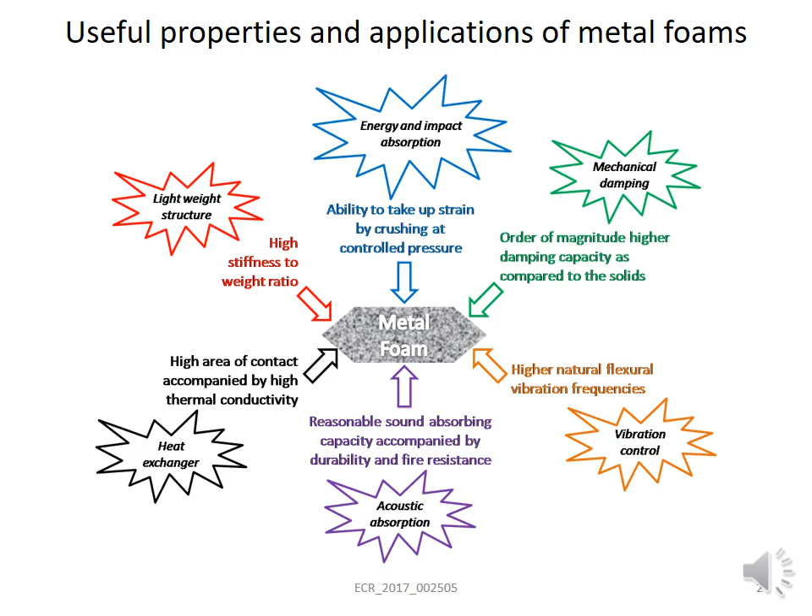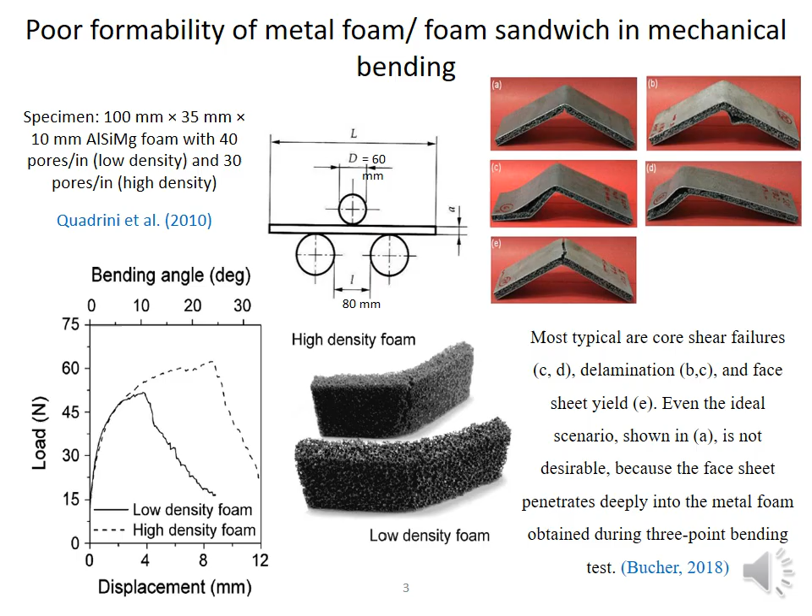But these materials are difficult to form mechanically because they lack the tensile strength, and at the bottom where there is high tension, it tends to fracture. Also in foam sandwiches there are other failure modes like core failure or penetration of the top sheet onto the core or delamination, etc. Thermal forming can come to rescue and laser, when used for thermal forming, the process is called laser forming. 3 different mechanisms have been reported for laser forming, like temperature gradient mechanism, upsetting mechanism and buckling mechanism.

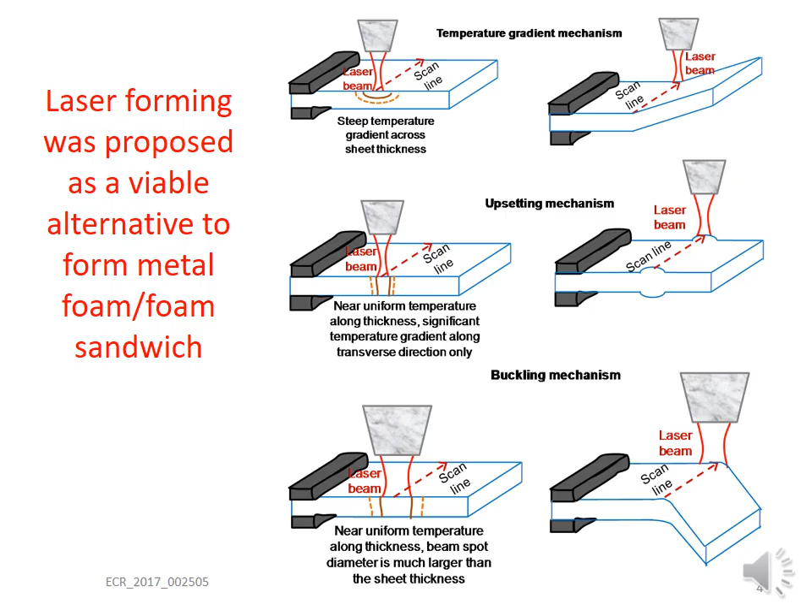So in temperature gradient mechanism, when the Fourier number is less than 1, the beam heats up a small depth from the top surface. This heated region tries to expand and is resisted by cold bottom layers. Therefore upon cooling, the sheet bends towards the laser beam. If the Fourier number is greater than 1 and the beam diameter is of the order of sheet thickness, there is very less gradient through thickness. The entire heated region tries to laterally expand and is resisted and compressed by the cold lateral sides. Under similar heating conditions, when the beam diameter is of the order of 10 times of the sheet thickness, there is buckling.

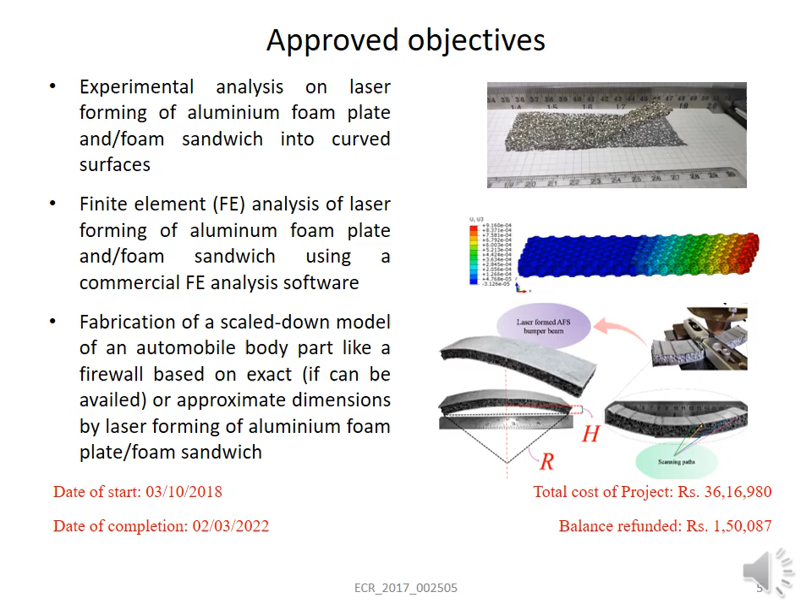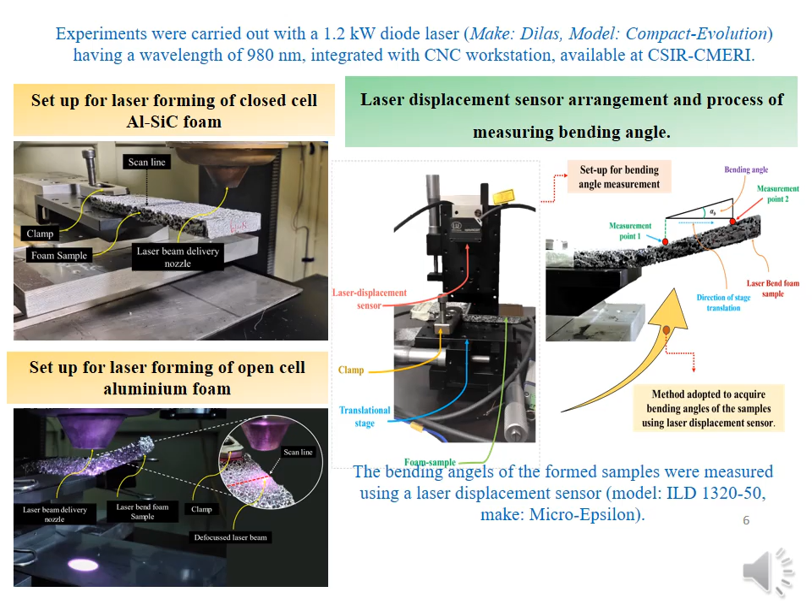These are the approved objectives. We have to do the numerical and experimental analysis on laser forming of aluminium foam and foam sandwiches, and also we have to demonstrate the process capability by laser forming a practical automotive part. So aluminium SiC composite closed cell foams, pure aluminium 95% porous foams and aluminium foam sandwich were used as materials. Bending angles were measured with the help of a laser displacement sensor mounted on translation stages, based on the laser triangulation method.

There were 3 different approaches of modeling the foam geometry in simulation. One is the equivalent solid model, where the properties determined based on scaling law were given, and the entire foam was considered to be an equivalent solid. In the cellular model, the average pore size is distributed throughout the model and solid material properties are given. And in the voxel model, the geometric model constructed based on CT scan is used and the solid material properties are given.

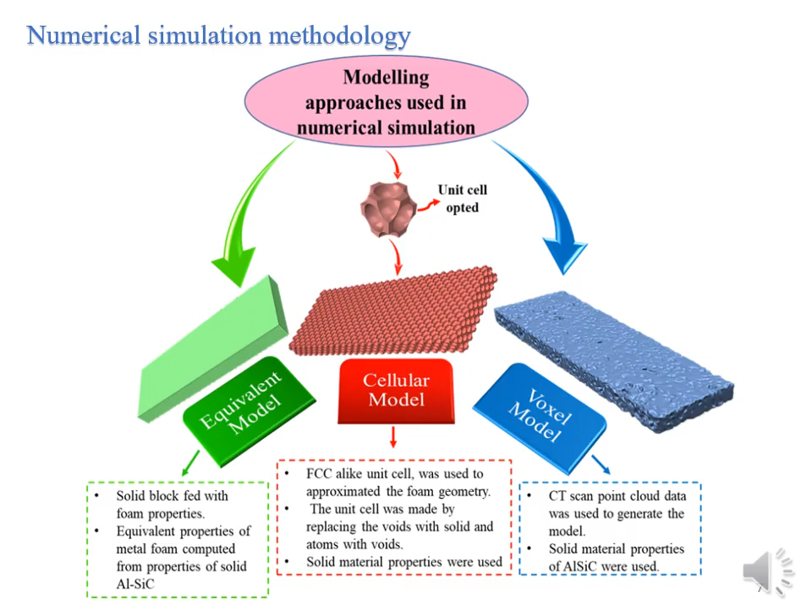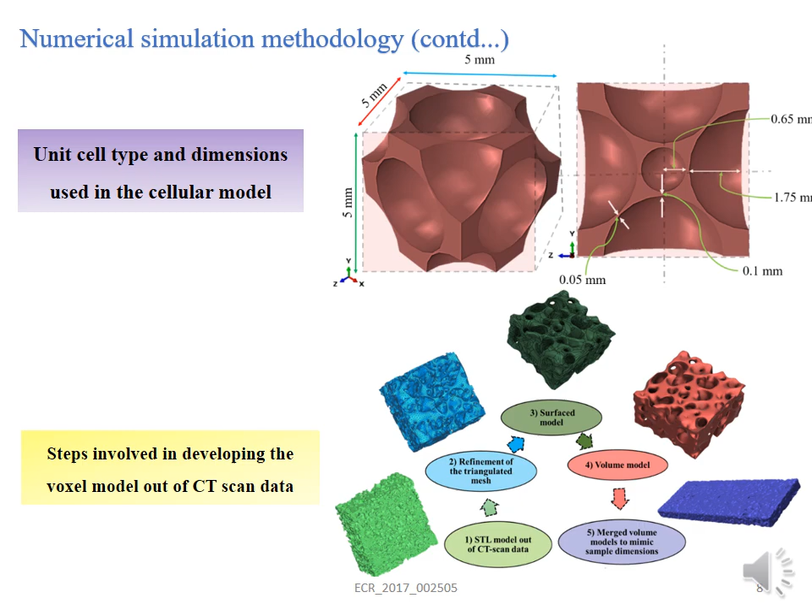We had used a different cellular model where, similar to the face-centered cubic crystal, instead of atoms, the voids were placed at the corner and face center positions, separated by the average strut wall size obtained through CT scans, and at the body center position a void of half size was placed to mimic the entire porosity of the foam, and this unit was repeated to create the cellular model.

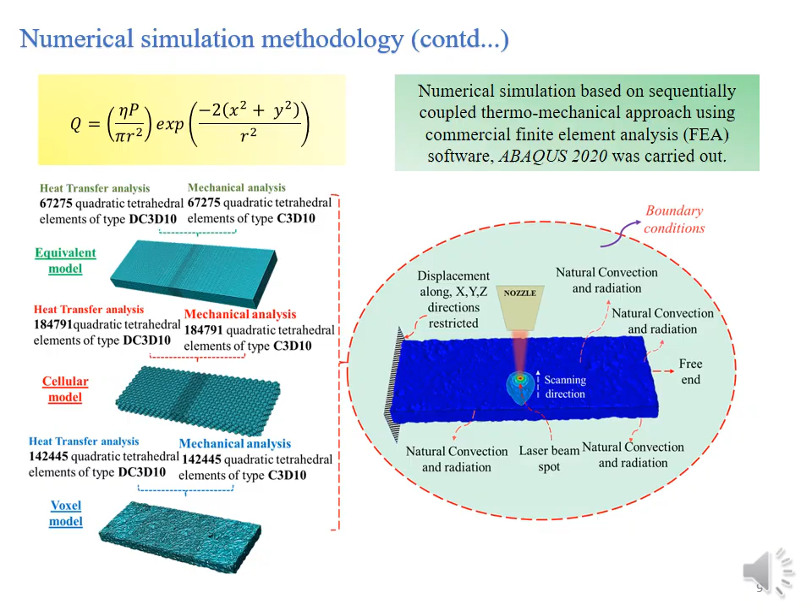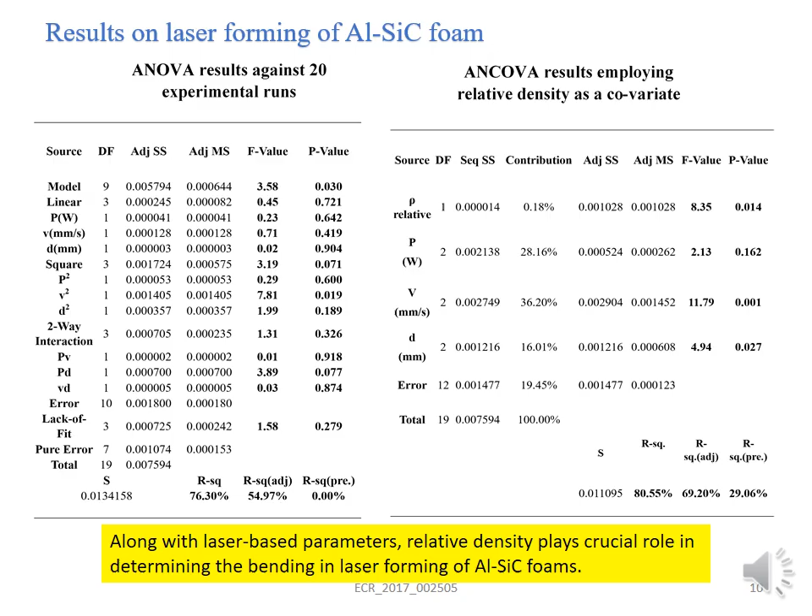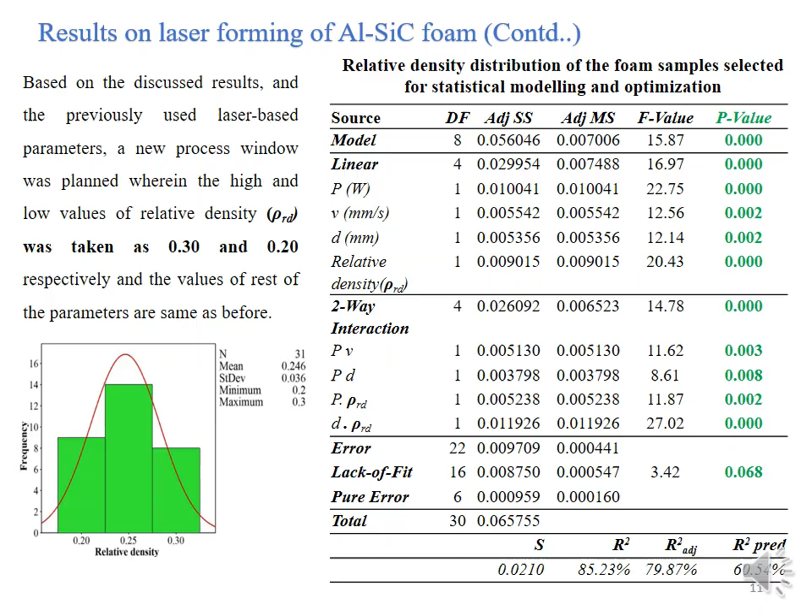The other assumptions included temperature dependent properties, radiation and convection, and Gaussian intensity distribution of the laser beam. Also sequentially coupled thermomechanical analysis was used, where transient thermal analysis is first solved and the temperature distribution thus obtained is given as a predefined field in the subsequent mechanical analysis. When we used the porosity as an independent variable, the lack of fit could be reduced, and the experimental results became significant. So apart from laser power, scan speed and beam diameter, the relative density was used as another factor.

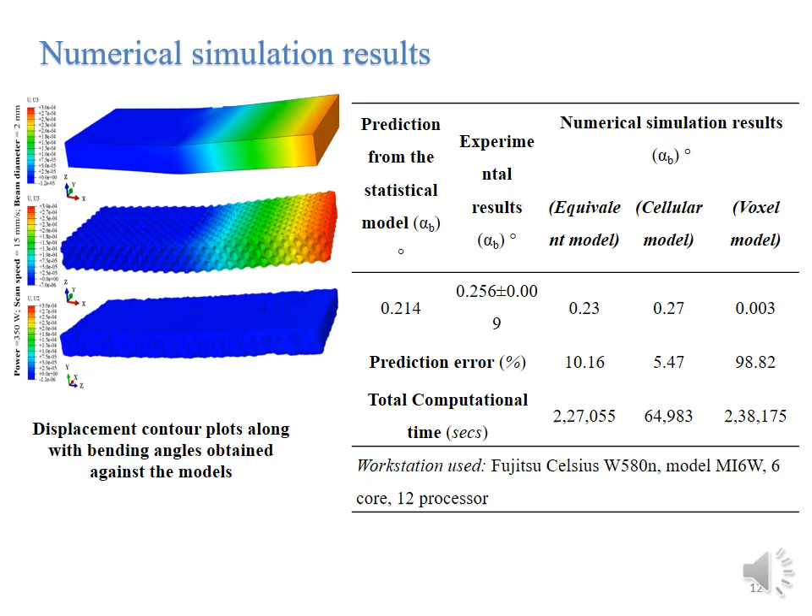So out of the three models, that is equivalent solid model, cellular model and voxel model, the cellular model gave the best prediction of bending angle, that too consuming the least amount of time. In the experimental results on open cell foams, there were some interesting observations. In laser forming of sheet metals, the bending angle per scan pass tends to reduce with increasing number of scan passes. However, that did not happen in case of open cell foams, because due to cell densification, the laser energy coupling was increased, and that could offset the effect of section thickening, strain hardening, and reduction in laser fluence.

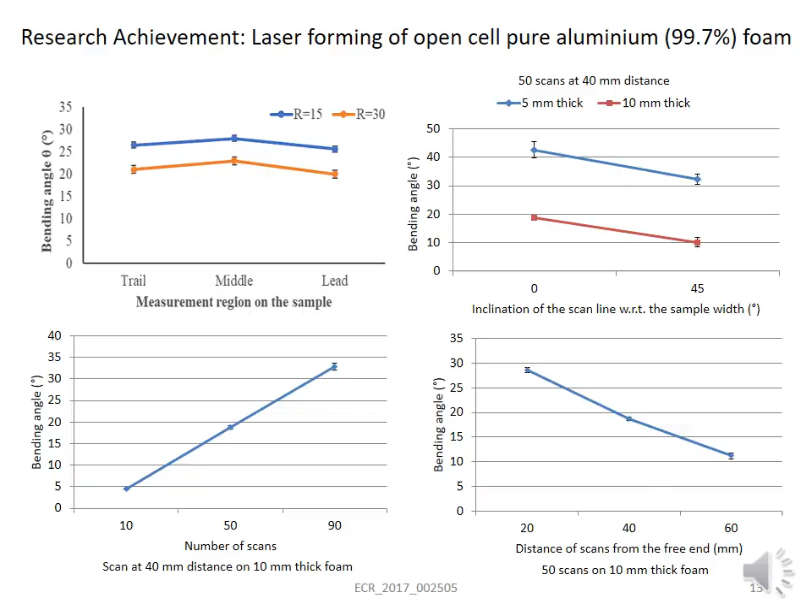The same thing could also explain the higher bending angle in case of higher scan path curvature. With increase in thickness, the bending angle reduced, and with distance of the scan path from the free end, the bending angle reduced as the paths were close to the clamped end. This work was reported in Journal of Laser Applications and was selected as a feature article.

So the final part was demonstration of process capability by forming an automotive part. A scaled down model of a bumper beam was chosen based on material availability and the size limitation of the workstation. However, the radius of curvature was kept the same as the original part. Since the part can be treated as a developable surface, bending through a sequence of scan lines could produce the part. Only production of half portion of the part is explained here.

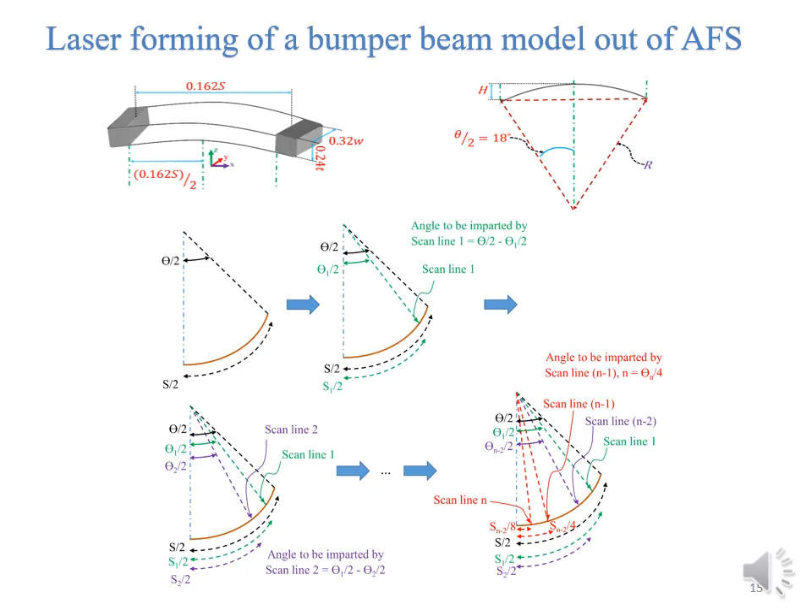Now you can place a scan line at a certain length of the curved path, and you have to impart a bending angle, which is the difference between the bending angle subtended by that curved part and the total bending angle subtended at the center. So that difference has to be imparted by that scan line. Similarly, you can go on placing scan lines and obtain the angle to be imparted by them. The final angle remaining from the total angle will be shared by the last two lines, which will be close to the central clamp. With that, we could obtain the required bending angle for each scan path.